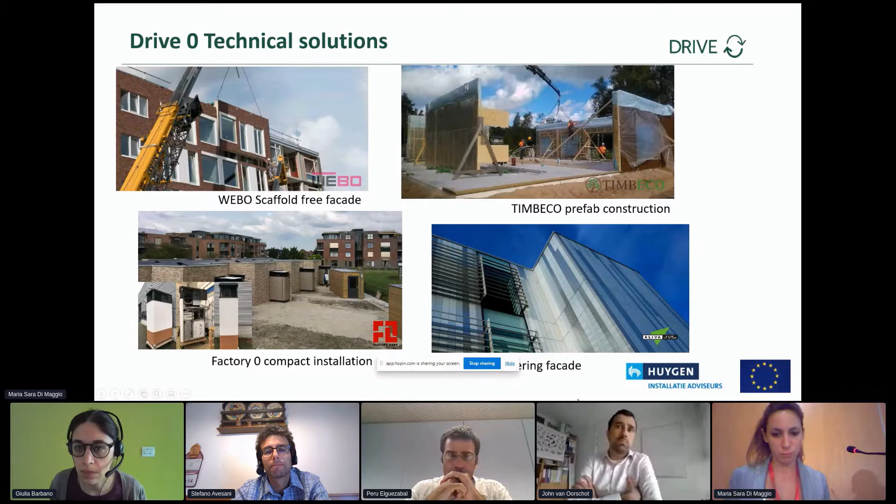As I mentioned, we take existing market-ready solutions. In the Netherlands, we have Webo scaffold free facade, Timbeco prefab panels from Estonia, Factory Zero compact HVAC engine, Aliva's aluminum facade panels, and Knauf insulation with bio-based binder as technology.

So we are taking these solutions that are market ready and seeing how we can make them more circular by using different materials or changing the design principles or business models.

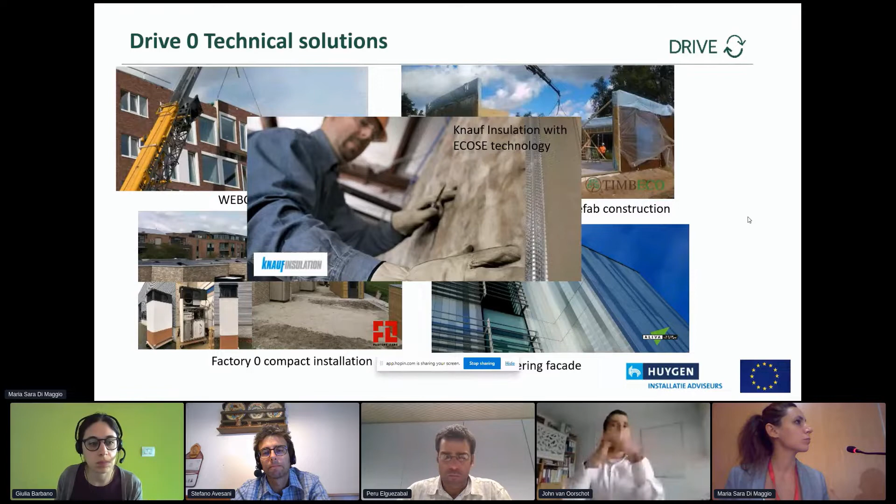So these are just some examples - this is, for example, where we are looking at how to go from the conventional deep renovation process to a circular deep renovation process, and what kind of actions we have to perform for a renovation process to be circular.

This is another example, and I'm happy that John is here because this refers to their demonstration pilot and their work at Zuyd. For example, here it's an example of urban mining in the case of the Netherlands, where urban mining is possible, or there are a lot of local materials available from the material banks.

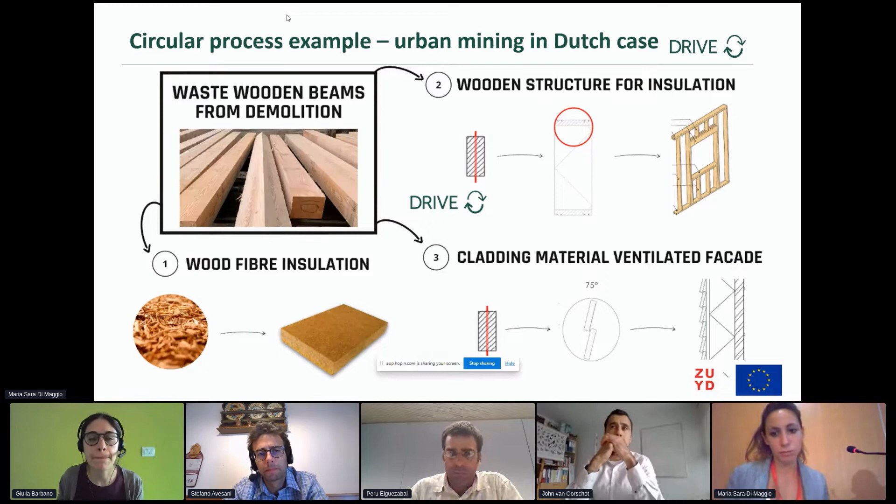And as I mentioned, we have 7 different pilot cases with completely different contexts, looking really at what drives circular renovation in this context.

As a last slide, we already identified - we just had on Monday our first project review meeting with CINEA, project advisor and external experts - and this is something we also communicated and discussed already. So what we see at the moment, there are quite some legal and regulatory barriers due to rigid building regulations and guarantees.

As you can imagine, applying circular components or materials and complying with current building standards is a bit difficult, because a lot of times, how can you prove that the recycled, for example, mineral wool has the same characteristics as a new one?

And there is also - I don't know if it's surprising, but I think it's rather interesting - the lack of interest in circular modular building solutions. So there is quite some resistance from homeowners to really decide for these circular components, because of course they don't trust that something that has been recycled will maintain its characteristics for the next 20 or 50 years, depending on the life of the component.

And then the other challenges, of course, there are quite some financial, legal, and operational risks in circular business models compared to conventional ones, and also challenges in the relationships in this new value chain creation when it comes to circular businesses.

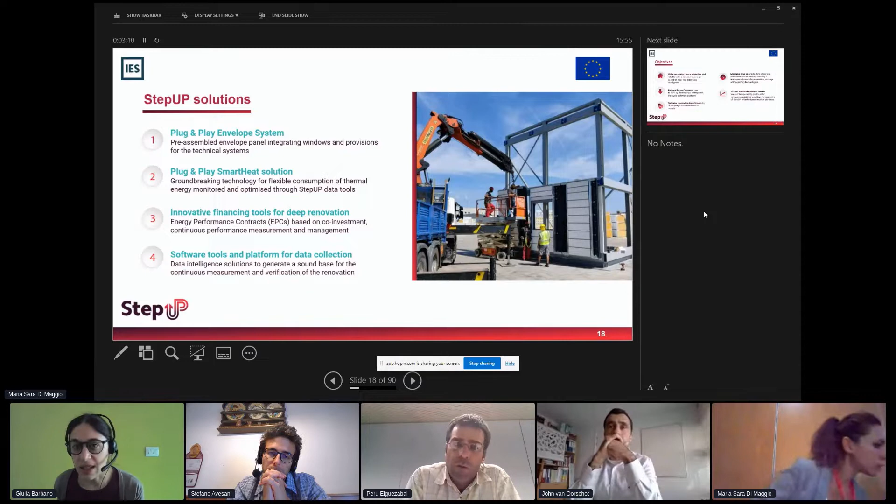Accelerating the renovation market for us is core. So once we have made renovation more attractive, more reliable, it's going to be easier to know how the performance will be, easier to finance, and shorter in time. Then the market needs transforming, and that's why we're looking at interoperability, clustering, and third-party market.

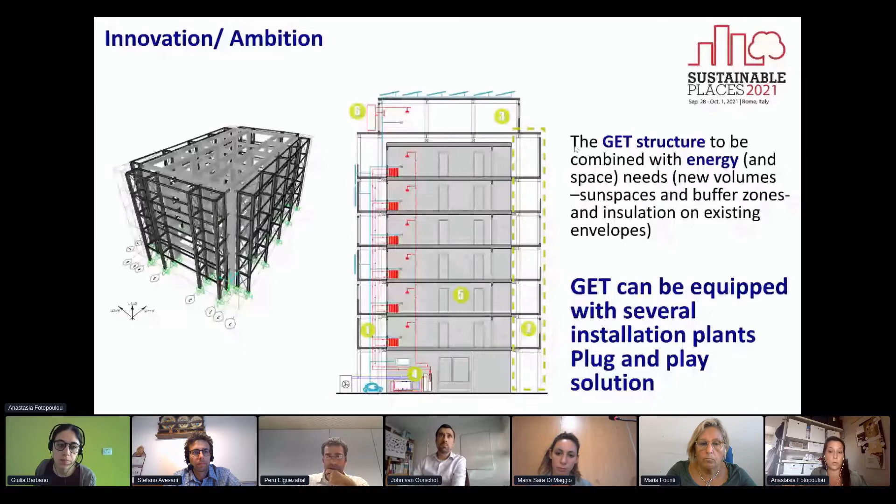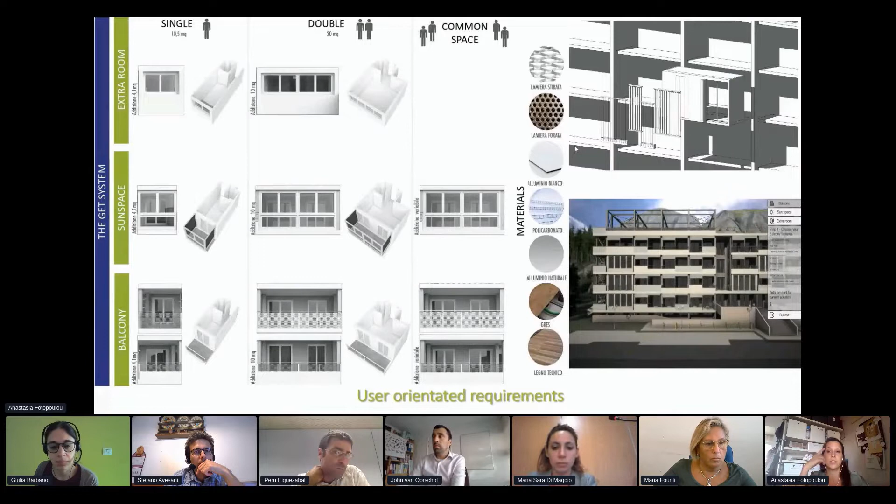As I said, social inclusion is part of the co-design process, and we have this application that's going to be online in almost a month, where users can choose various materials or options for this extra space, which could be a balcony, a sun space, or an extra room. There could be variation in the facade, and each one can see the capacity and performance of each solution, so they can choose according to their needs and expectations.

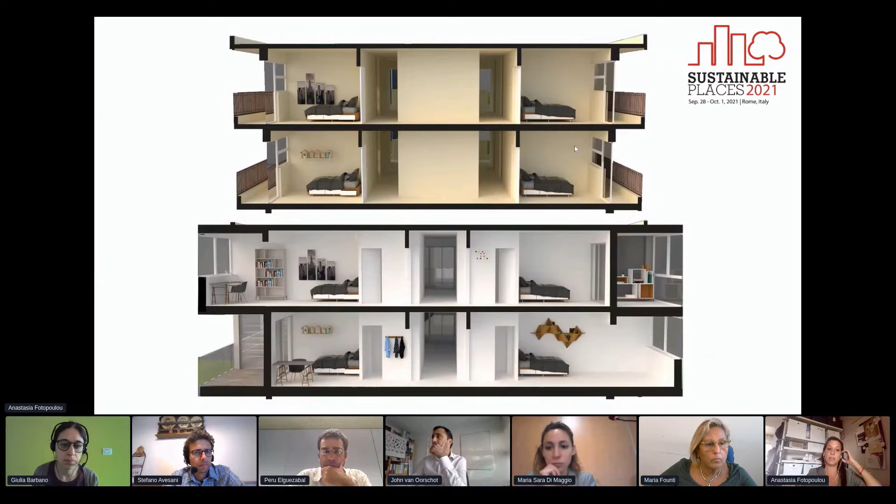We have a real pilot case in Athens and two virtual ones in Italy and Brasov. The one in Athens is a dormitory, a student house. This is the situation as it is now, and by adding this exoskeleton in the extra spaces, we have extra living space for the students. This is the view from the external and from the internal, showing the desirability from the architectural point of view, and the social inclusiveness, how they feel from the internal part.

Some remarks on the project: by increasing the desirability of the transformation, we stimulate excellence in energy performance, up to the ambitions of nearly zero energy building targets in the most inefficient buildings of modernity, which is the majority of buildings in Europe. We also tend to overcome the limitation of indoor space and add new quality for indoor personal and professional activities, which is very important, as we've seen during the pandemic period.

Unfortunately, as with all innovation processes and strategies we have in mind for these projects, we have faced a lot of barriers. Two of the main ones are the lack of legislative flexibility, so we have to see how to overcome compliance with local regulations, and for this kind of exoskeleton and integrated technologies on the facade with the extension, we have a limited market because we cannot use it, for example, on historical buildings and other restricted, listed architectural buildings.

Some of the main challenges include how to overcome the higher costs that the solution creates, but in contrast with less time. So we compromise these more expensive solutions with the added value of the extra living space and less disturbing procedures, constructing it in less time than a traditional internal renovation. Another challenge is the integrated technologies and prefab plug-and-play components, to see how these facade extensions can interact with new HVAC systems, collaborating together with the existing centralized heating and cooling system. So that's it for me.

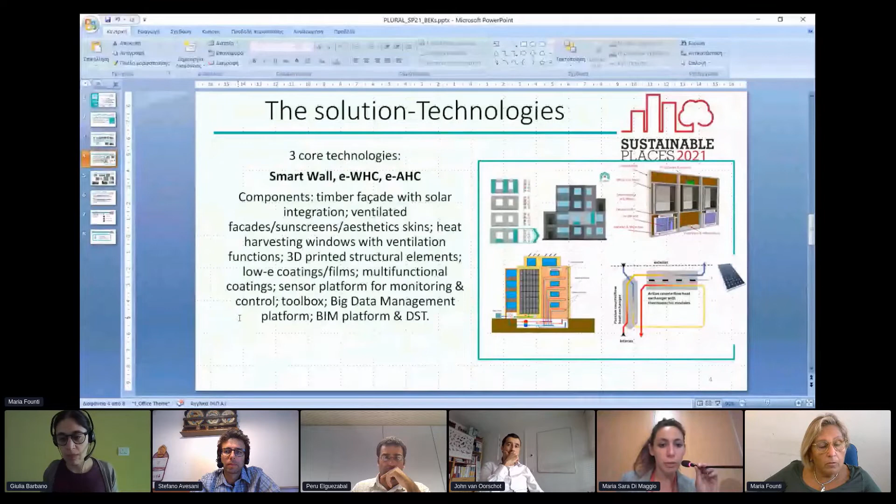Okay, so here are the solutions and the buildings.

Let's go on to the key barriers and challenges. Although we are in the first year of the project, we have identified 2 key barriers that might prohibit the implementation of our solutions in the market.

The first one is the lack of knowledge about this type of second-generation solutions by key stakeholders. The lack of knowledge dictates that the market demand for this type of solution is very low, and as a result of the low market demand, the need for compliance with local and EU regulations is still not addressed. And last but not least, the lack of knowledge by key stakeholders dictates also that there is not enough training taking place for stakeholders and companies to implement such solutions.

Another key barrier is the compatibility of technologies, specifically for this second generation of prefabricated solutions, where we have to find ways to match the environmentally friendly facade solutions with the renewable energy source requirements and capabilities.

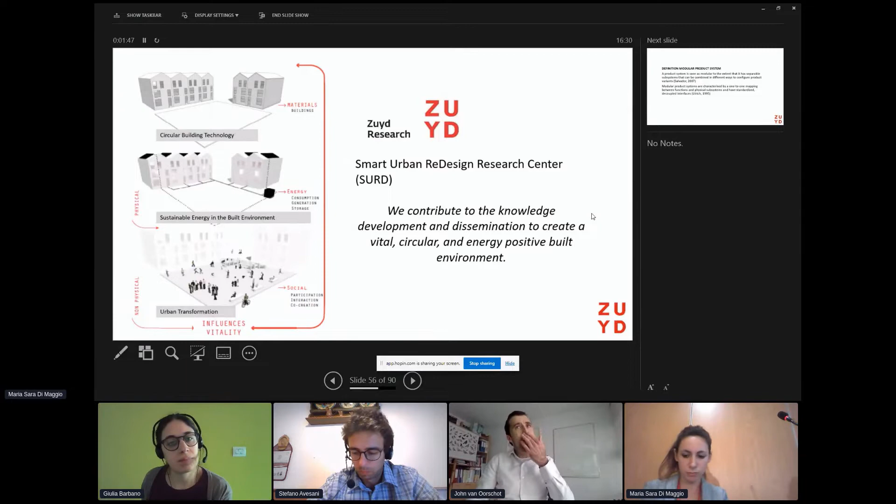This is a very brief introduction of what we consider a modular product system, just to grasp the idea of where we are taking it as a key strategy to our Drive Zero project. And actually, as defined in scientific literature, modularity is in essence a one-to-one mapping between functions and physical systems. I will show you in a minute some examples of what we consider these very important examples of modular product systems. So let's go to the next slide.

Well, these modular product systems in themselves are already mentioned by various knowledge institutes as key strategies to arrive at a more circular and sustainable built environment. So it's not only that we define them in our project, but it's already identified in a broader perspective as a key strategy to boost sustainability overall. Let's go to the next slide, Maria Sara.

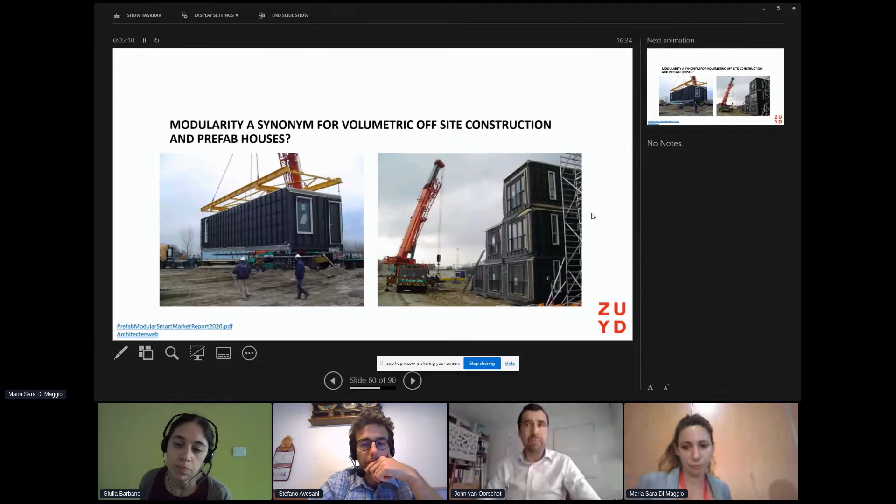Let's go to some examples. But before I do that, I want to highlight what modularity is not, because modular products also have this definition of being off-site produced prefab elements. However, examples like these volumetric pods can be very much integrated systems overall, linking various technologies together and hosting a complex set of functionalities. So this is something different—this is only modular products viewed from a prefab production perspective. So let's go to the examples which we indeed consider as modular product systems, this one-on-one mapping of function and technologies.

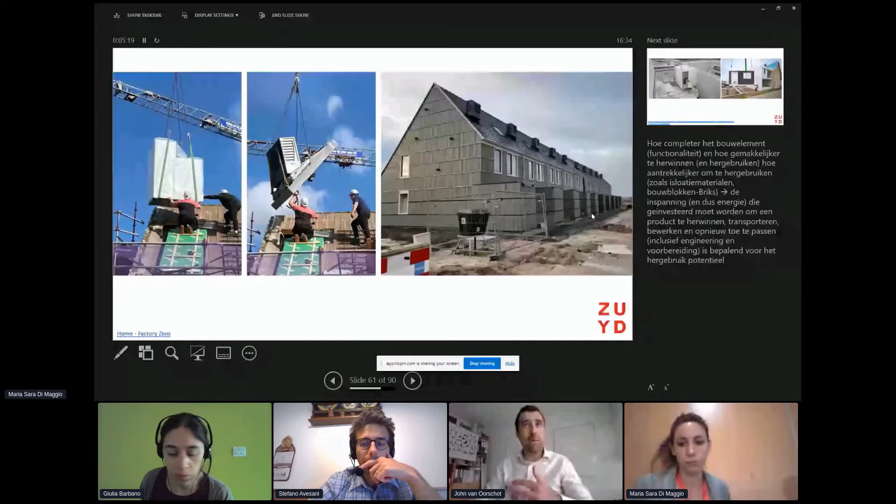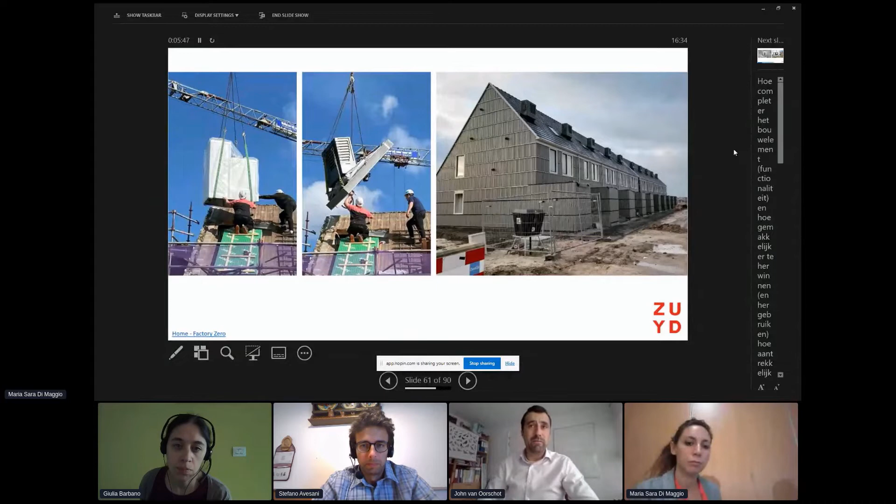Anna already showed the example of Factory Zero in the Netherlands, which produces these prefab HVAC engines that you can simply install in housing. There are various types of these modules for various types of housing units, providing all kinds of services. Another example is on the next slide, Maria Sara.

You can see on the left side a modular bathroom pod which is industrially produced off-site and can easily be installed and connected to the building, but also taken out. In this example, it's removed via the facade. These modules can also be taken out and replaced if necessary. On the right side are two further examples: modular structural elements and facade modules enclosing the building.

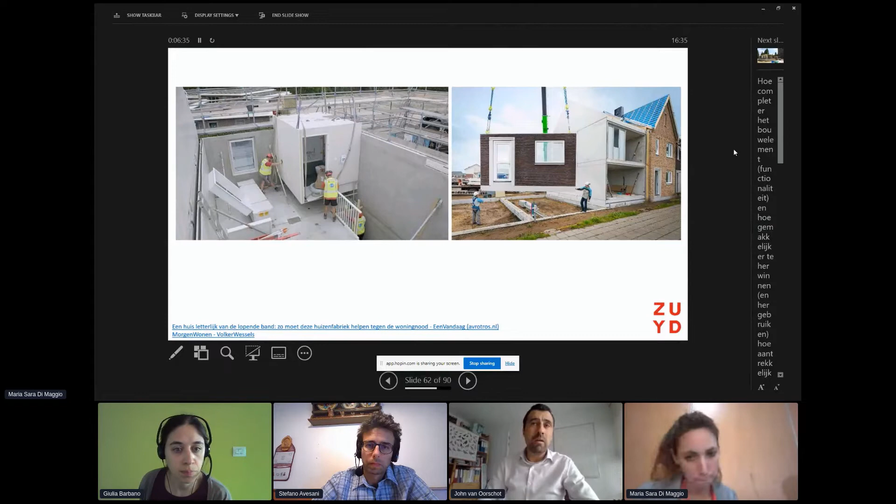What we learned from a previous project, the Super Local project here in the Netherlands, is from a different program. But what we did here is try to dismantle a building and build new housing out of recovered building materials. It was proven here that modularity is a very important concept, because it was very complex and expensive to take out parts of the building and reuse them in new built housing units. We succeeded, but it was very complex and risky. This project proved that many buildings built so far are not modular at all, very hard to take apart, to harvest building materials and do something valuable with it.

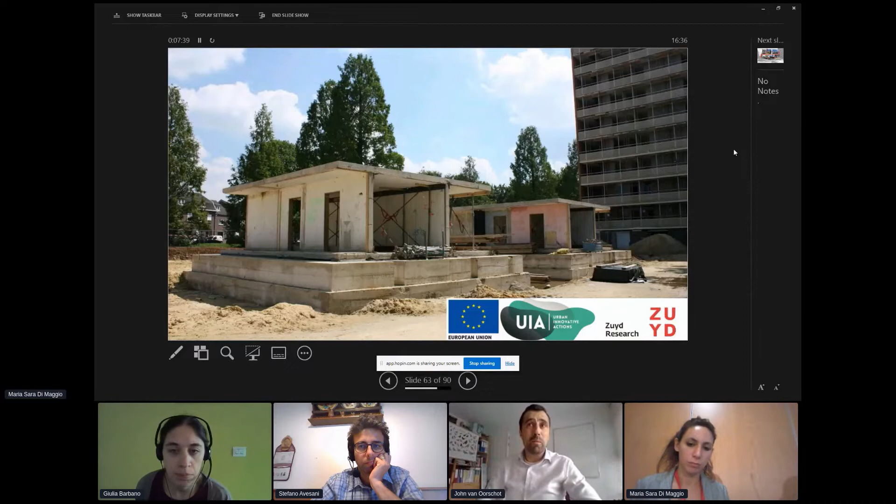I'm almost at the end. This showcase just gives you a small impression of what is actually needed to do so - very complex, expensive technologies to really achieve this.

In the paper I'm referring to, I already identified various barriers, and hopefully I can contribute to the discussion today based on previous research we conducted in this field, applying modular products and the preconditions you need to meet in order to do so. That was it in a very brief way - I only had a couple of minutes to enlighten you about my ideas on modularity.

Thank you, Maria Sara. It was very clear, really interesting how you can define modularity without using a modular project, like the example of the concrete reinforced building. I think this already explains how much we can do if we start working with modular systems and provide more value to every component and building material. Thank you for this teaser. We'll move on now with another topic on the financial side, I would say, of the industrialization of building facades. Stefano, please, the floor is yours.

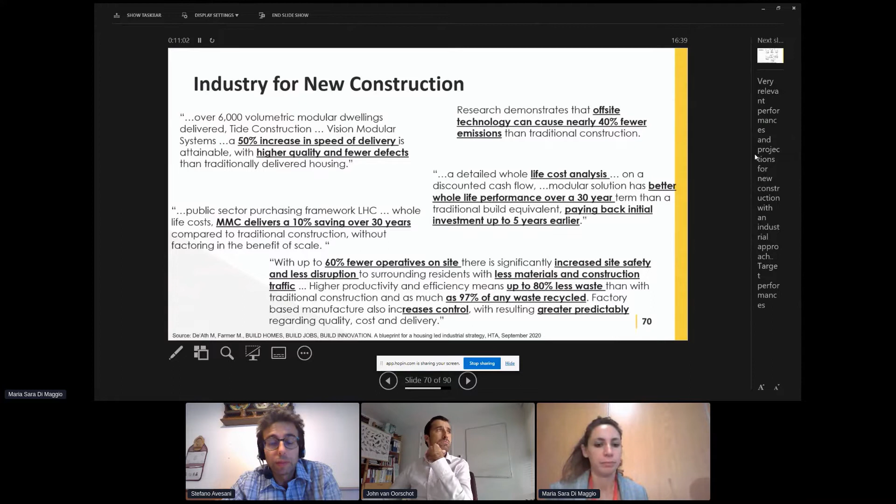We can see from many reports that there are facts for new construction where, basically in terms of speed of delivery, improvements, emissions, and life cycle costings, there are new construction benefits for industrializing.

I think single numbers can be read more relaxed at times, but it was nice to pick up some keywords from different analyses and topics. Besides quantitative indicators, there are also qualitative indicators like higher quality, fewer defects, higher safety, and wasting, which are also related to the potential of industrialization.

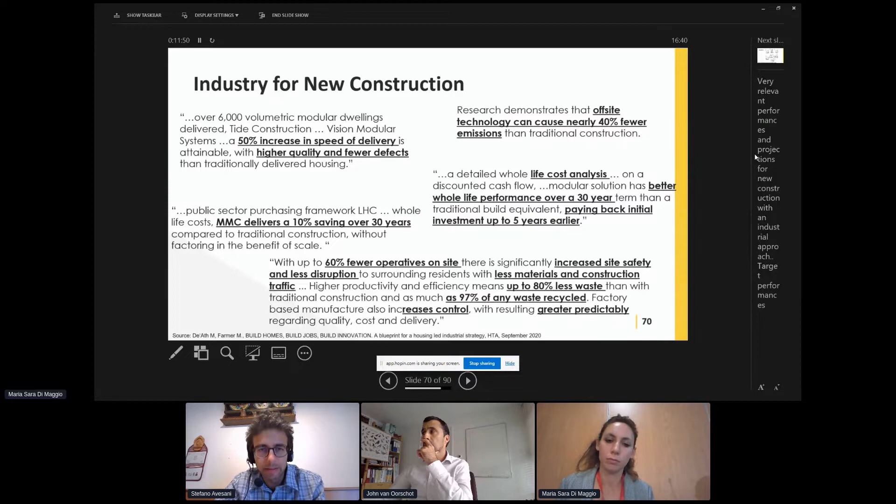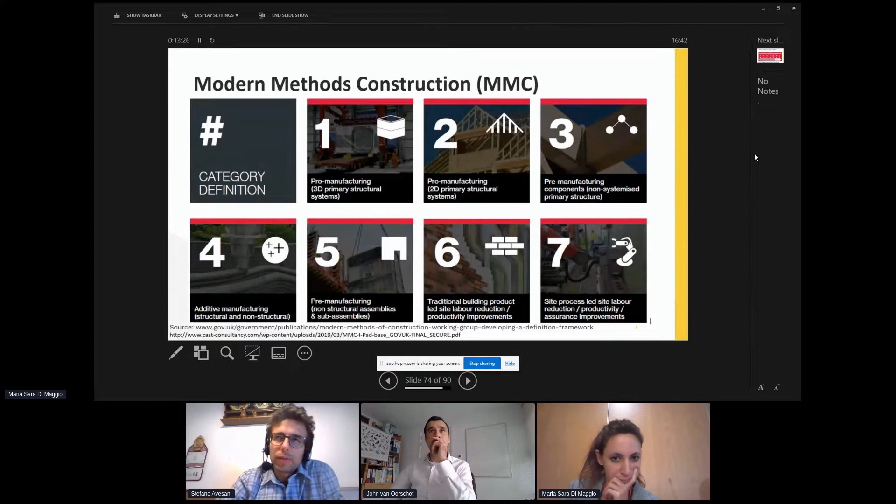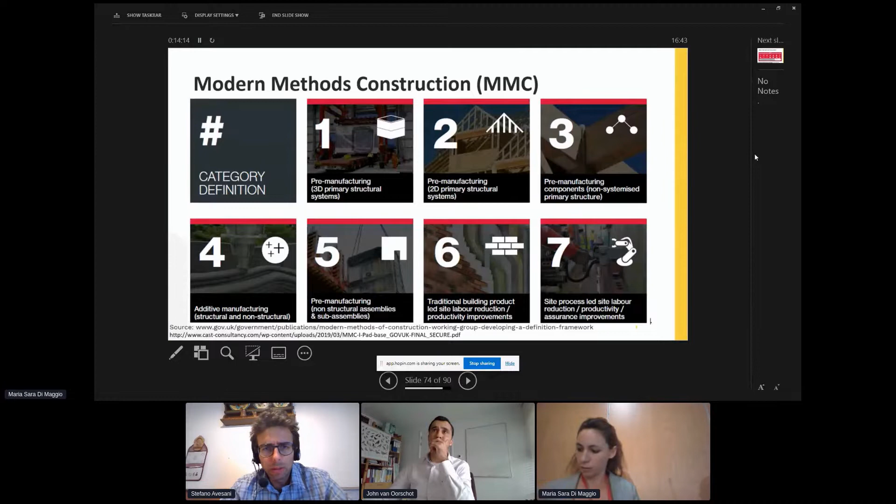So 3D and 2D prefabrication of components and systems, but also, for example, additive manufacturing, which I think is a potentially innovative topic to bring in. And also activities on site that could be improved with simplified or improved products, but also with improved labor on site. I'll move to the last section of the presentation.